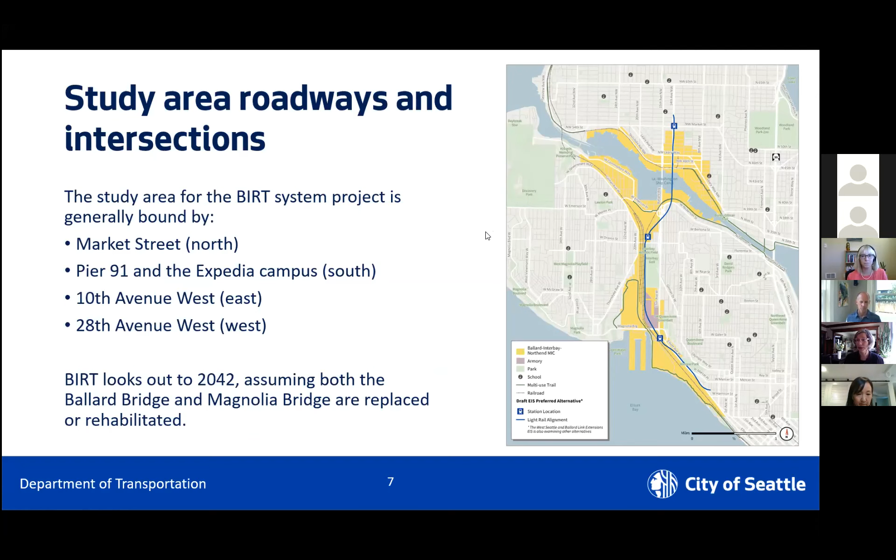We did a forecast and assessment of multimodal integration with our Fehr and Peers consultant team and Concord. We are here in July and August, and we are involved in a cost benefits analysis of both the social and economic impacts of both the Ballard and Magnolia bridges.

We're going to be moving into September before we know it, where we'll have developed the bridge replacement timeline and a funding strategy. And I need to say at this point that the bridge replacement timeline and funding strategy is basically saying, if we started today to replace the bridges, what would it take to get there?

So how much design time does it take? How much public outreach time does it take? How much environmental time does it take? Where do you find funding, both federal, state, and local, perhaps in terms of a Move Seattle levy or other funding opportunities? So this is just conceptual.

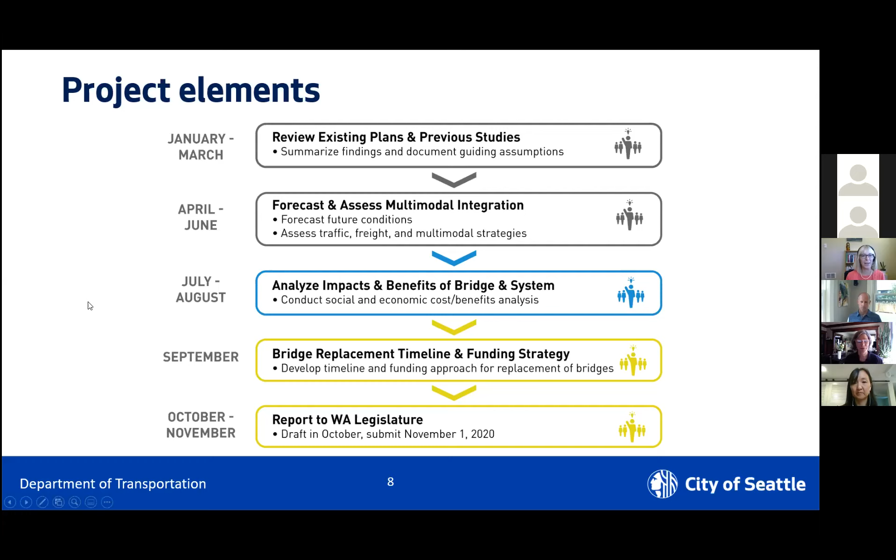Great, thanks, Diane. So in terms of the products that have been created and the deliverables that are complete, you can go to our website, which you see in the bottom middle of this slide, and you can review the document and plan review. I think it's around 70 pages: the methods and assumptions memorandum, the multimodal needs assessment, and coming soon to the website will be the social and economic baseline analysis.

These are all of the products that will be informing our report, and they're quite detailed. They will serve as appendices more than the report itself.

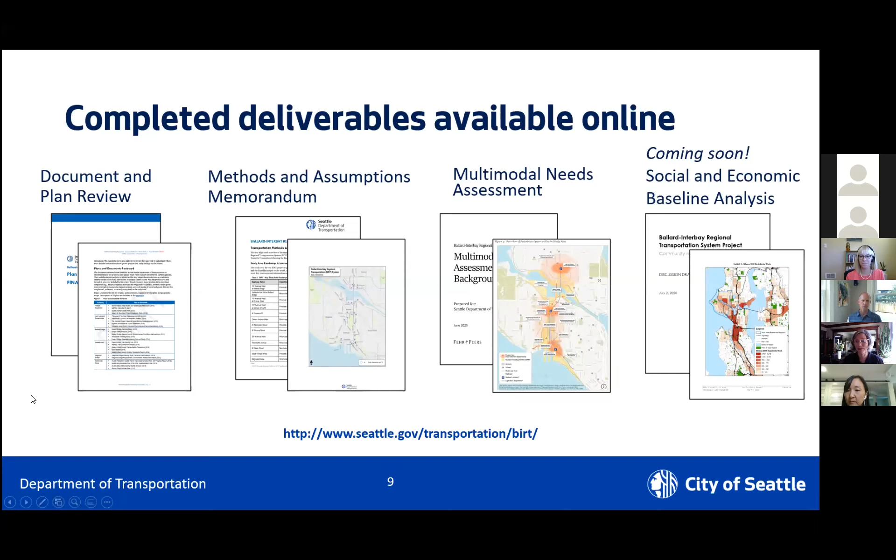Next, we've been doing some stakeholder outreach and engagement. This is largely a technical study, and yet we want to hear what people think about our recommendations and their concerns about their neighborhoods and how they travel and how they get around and how they want to get around in the future. We have met with several of our elected officials and community organizations. The City of Seattle has modal advisory boards; bike board and freight board are the ones we've spoken to.

Chisaki has helped create a worker survey down in BINMIC. We've had some business interviews and meetings. We are working with Sound Transit on the West Seattle Ballard Link Extension Project, and I have been involved in those surveys. We've talked to the bicycling and walking community from the neighborhood greenways, and we have also been in coordination with the Mayor's Maritime and Industrial Strategy Project.

So we are very grateful that you are all here participating. We strongly encourage you all to go online, take the survey if you haven't, and make comments on our recommended projects. But we have this meeting, and we have a meeting next week on Thursday at 6:30.

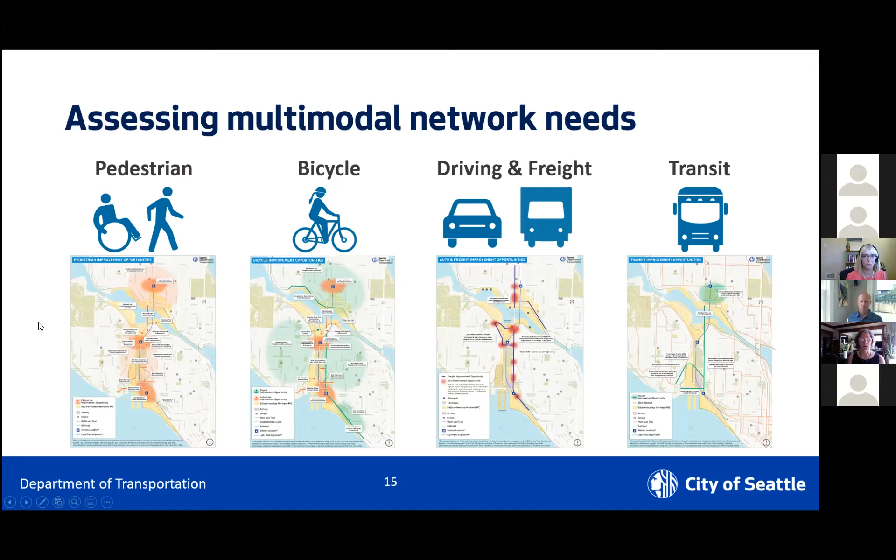As we head into the next piece, I want to quickly touch on a question that was asked, related to needs around the Ballard locks and coordination with the Army Corps' Ship Canal Master Plan. That has definitely been part of the work, and you'll see that reflected as Tom moves into talking about some of the specific projects. In addition to the Ballard Bridge being a core bike connection, the locks was another one that came up, so we'll wrap that in as we start talking about the projects moving forward.

Thanks, Jennifer. So again, BIRT is really focused on improving movement for goods and freight using a multimodal system of improvements. While replacement of the Magnolia and Ballard Bridge is a core topic of this study, we are really looking at producing a coordinated set of phased improvements that address multimodal needs for all users throughout the district. The project looks at bicycle and pedestrian needs and where there are gaps and opportunities to fill those, safety for all modes, and transit from the standpoint of maintaining reliability, improving passenger amenities, and providing connections to core services, including future light rail.

We're looking not only at spot improvements but corridor level improvements as well. We know that as trucks move through the district, they're more concerned with how long it takes them to get from point to point versus performance at a specific intersection, and what that means for roadway design and safe movement of freight. We know our industrial and freight haulers want to move safely and protect pedestrians and bicycles as well. And then, of course, the bridge projects that really ground our work here.

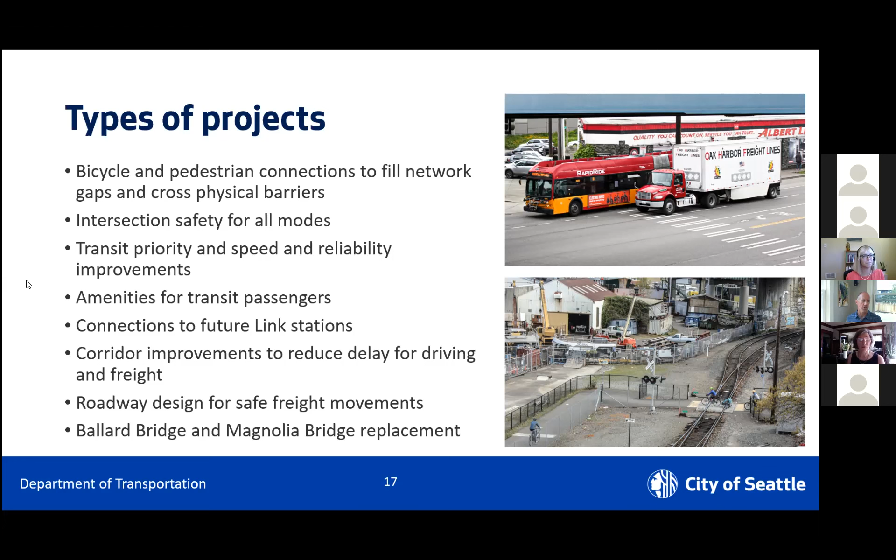We want to be clear at this point that no decisions have been made about bridge alternatives. There have been very complete planning studies prepared for both the Ballard and Magnolia Bridge that we're using as core inputs for developing that timeline that Diane talked about. We have taken the two highest prioritized alternatives from each of those studies as inputs to the scenarios we're looking at within the course of this study.

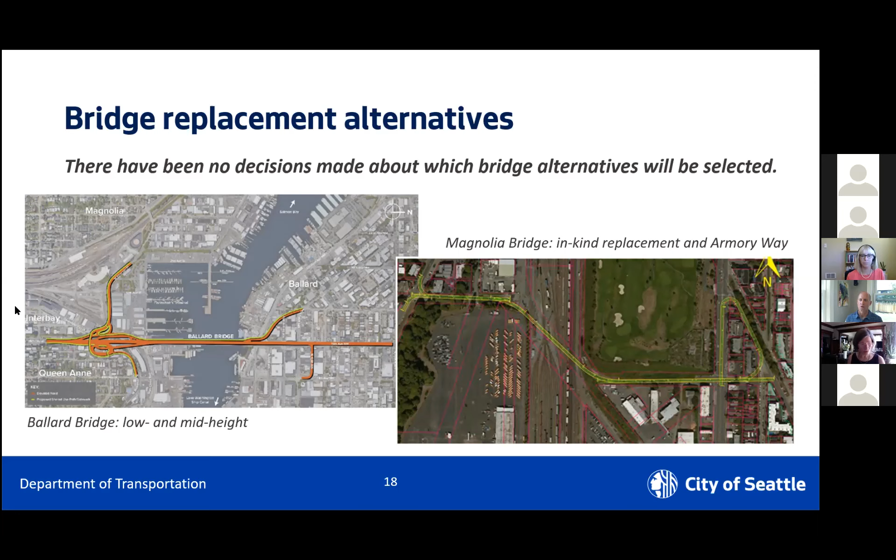For the Ballard Bridge, that includes both the low and mid-height alternatives, for those of you familiar with that work. And for the Magnolia Bridge, that includes both the in-kind or one-for-one replacement and the alternative, which is the Armory Way alternative. For those familiar with that, it has several elements. A core element is a new Armory Way connection between 15th and Thorndyke, and a new West Uplands perimeter roadway.

As we move into the potential projects, we're going to be talking about a wide range of multimodal projects here today. The team has evaluated over 80 projects, looking at their ability to meet those core project goals and criteria that we talked about. After that first round of analysis, we're moving forward more than 40 projects.

There's a lot for us to talk about. We won't be able to get into all projects in detail, but we want to hit some highlights and encourage everybody to go to the website. We've got an interactive project map that shows each individual project. You can comment on it there. I know many of you have done that already. I believe Jerry is going to post the web link to the chat in case people want to bring that up during the meeting.

I would stress that we have a range of small to quite large and substantial projects included. Some of our projects are dependent on one of the specific bridge alternatives. For example, we have a concept that includes freight and transit lanes on the Armory Way Bridge, which is obviously associated with the Armory Way Bridge alternative and not the in-kind Magnolia Bridge replacement alternative. Again, the website makes that clear.

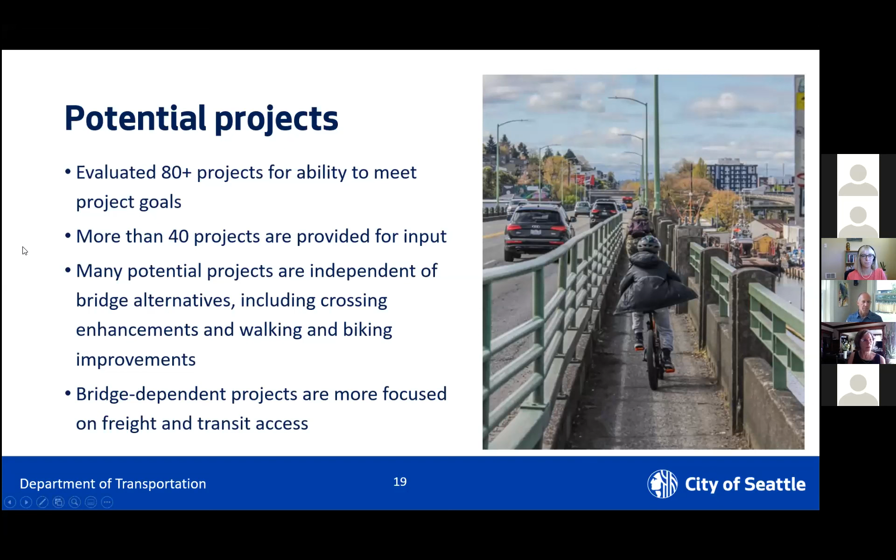We also want to note that some projects are in tension. We have concepts for different portions of roadway that probably couldn't both be implemented, but all have strong value. So one of the things we're really hoping for from this round of input is to get the community's perspective

on some of those projects that may be in tension in terms of their implementation. So with that, why don't we move into our description of projects by mode, and we'll start with our pedestrian projects. Historically industrial areas were really not developed often with pedestrians in mind, but with light rail coming and more diverse land use activity in these Ballard and Interbay neighborhoods, we know that there's a strong need today and in the future for safer pedestrian movement and a higher quality pedestrian experience.

Our project list includes a number of corridor-long and site specific projects that improve sidewalks, that address lighting, ADA curb ramp needs, as well as bridge crossing improvements for major impediments such as arterials or the rail tracks.

A couple of the core corridors where we propose continuous improvements include 14th Ave Northwest in Ballard. That's a project we've seen a lot of support so far on the website for. Northwest Market Street, as well as the Elliott and 15th Ave West corridor. Those are all corridors where there's significant opportunities for sidewalk widening, pedestrian enhancements, better landscape buffer to protect people from moving traffic along the roadway, lighting, and curb ramps.

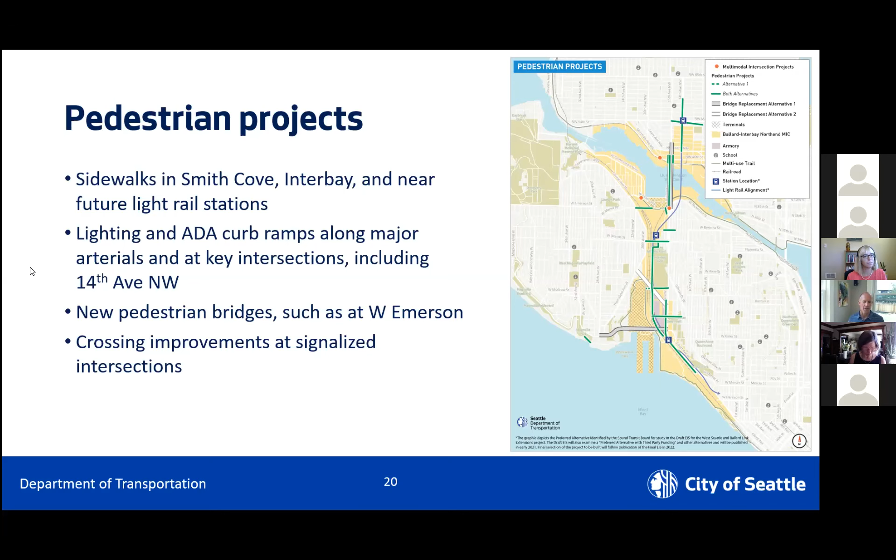One example of a pedestrian improvement is the West Emerson Street overpass concept. This is a location where we've heard a lot of comment, including from the Magnolia Community Council, about the danger of school students and high school students crossing 15th Ave West here at an unmarked and rather dangerous location to move between bus routes as they're making trips.

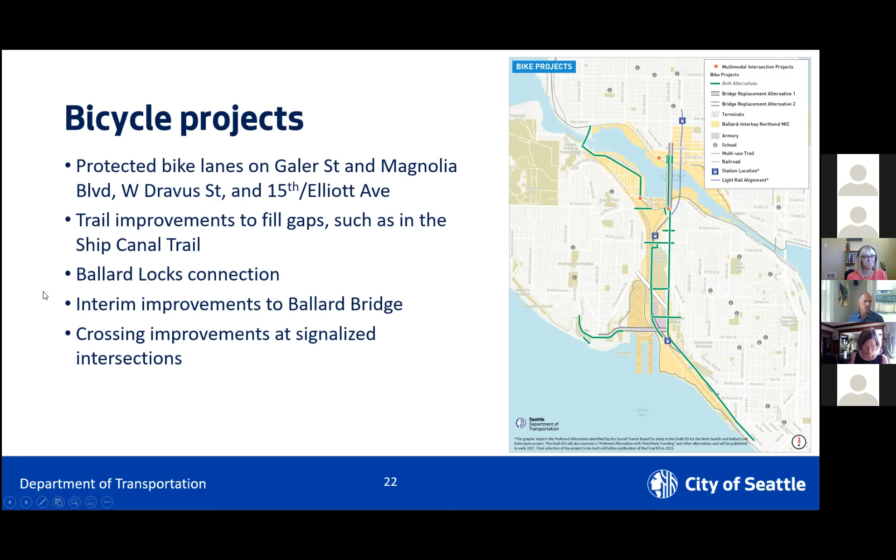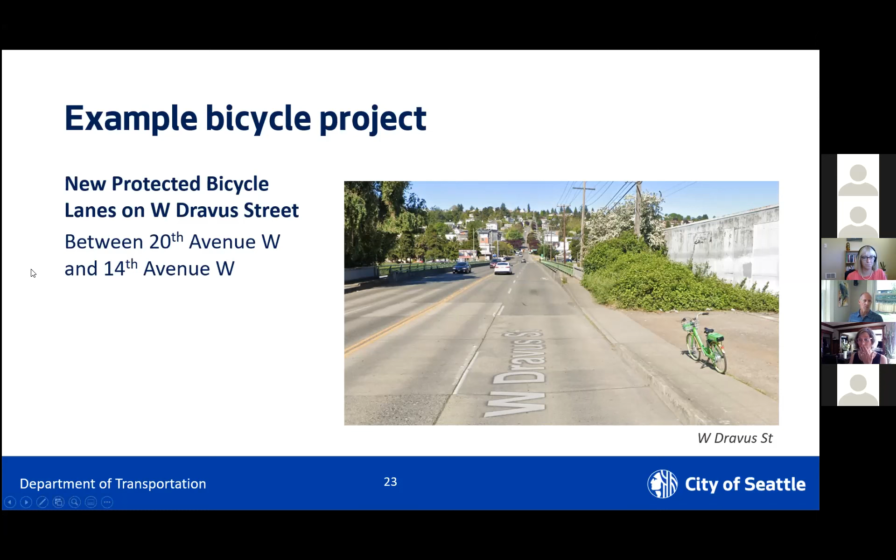As I mentioned earlier, this is one of those places where there are a number of multimodal needs, so this project may be in some tension or have other ways to be considered as we look at other needs in this portion of the corridor, including for transit.

I also want to mention that while we're walking through these projects, a number of them are truly integrated and multimodal. A good example is where we're looking at an opportunity to improve safety for bicycles and pedestrians, but also doing so with the importance of freight and truck movements in mind. 21st Avenue and Emerson Place is a project that comes up as one we've heard a lot about - close calls with trucks, peds, and bikes - from the freight community, who want to be able to move through that more safely. So this is a project where we really have the opportunity to address safety and reliability needs simultaneously.

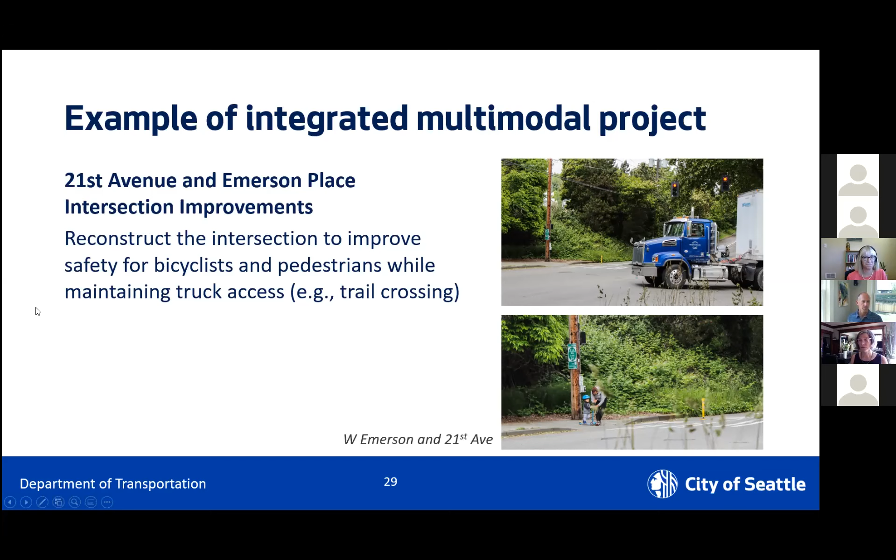So moving on to transit and freight. We certainly know and recognize that transit and freight do not have all the same needs. But within the context of the BIRT study area, where there are fairly limited numbers of arterial streets, bus transit and freight and goods movement tend to need to operate in the same corridors and on the same facilities.

We also know that with future development of the light rail system, there will be quite a bit of change to the bus transit system in this area - some streets will have lowered bus volumes due to the new grade separated light rail line, but there are also potential plans to restructure new service to terminate at or near light rail stations. So while we don't talk a lot about those station-specific needs relative to intermodal bus movements, those are being planned as part of the Sound Transit project, and we're in close coordination with those teams to recognize those needs.

So as we look at some of the core opportunities for transit and freight, one of the things we're looking at is the opportunity for transit and bicycle integration on that West Dravus Street section we talked about previously. This would be a little bit different look at how we use that cross section, potentially allowing transit and bicycles to operate in some of the same right-of-way, given the physical constraints in that area.

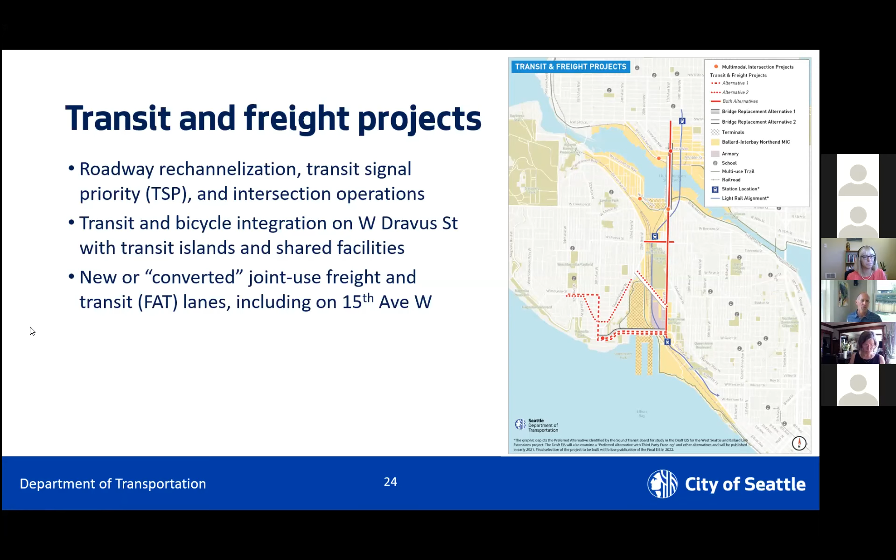Another concept that comes up a couple times in the project list is the idea of using new or existing transit lanes as joint use freight facilities. And how would this work? We've got an example on the next slide of one of the projects, which is the 15th Ave freight and transit lanes between Denny and Market Street.

Essentially, this would allow both transit buses and freight and delivery vehicles to use the bus-only lanes on 15th Ave during off-peak times. It wouldn't allow trucks in those lanes at peak transit times where we have high bus volumes, but while there is more capacity, it would provide an opportunity for trucks to bypass some of the congestion in that corridor.

Tom, as we're moving on to talk about corridors, one question that has come up, which gets to something you were talking about before in terms of some projects potentially being not necessarily in tension with one another but maybe not able to do everything - is the bike project and the transit project mentioned for Dravus about reconfiguring the roadway space that's there versus widening, recognizing, as some folks are pointing out, that Dravus is an important connection, but it's trying to do a lot as well?

That's a good question, and at this point, we're open to both alternatives, but again, we recognize the very, very high cost of replacing that bridge facility to add more right-of-way.

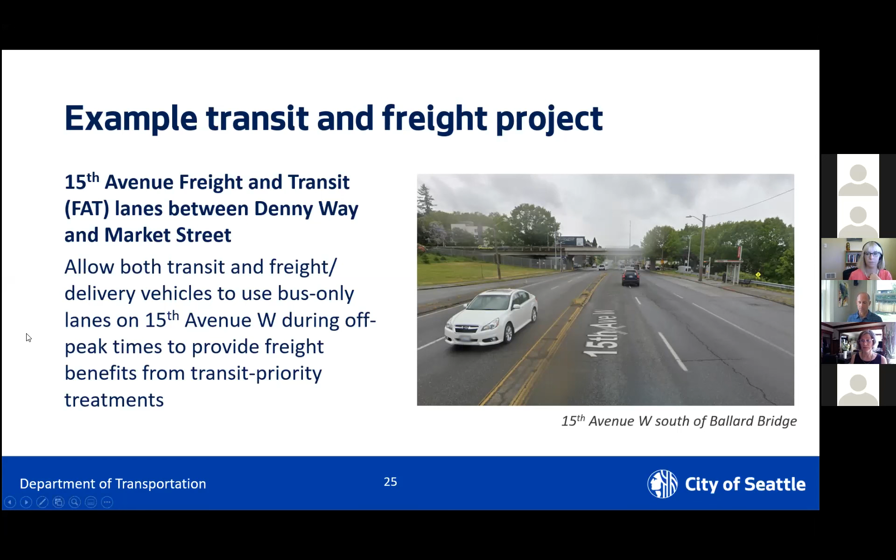Okay, great, thank you. So I'll move you on to corridors, and then we can come back to that as we head into Q&A.

In the transportation business, when we have very constrained corridors serving many needs, as we've shown to be the case here in BIRT, given the relatively limited road network and the pressures on that, one of the things we look at is how we can improve operations, which for the user means more reliable movement through those corridors, more reliable travel times for people in vehicles, for transit, for freight.

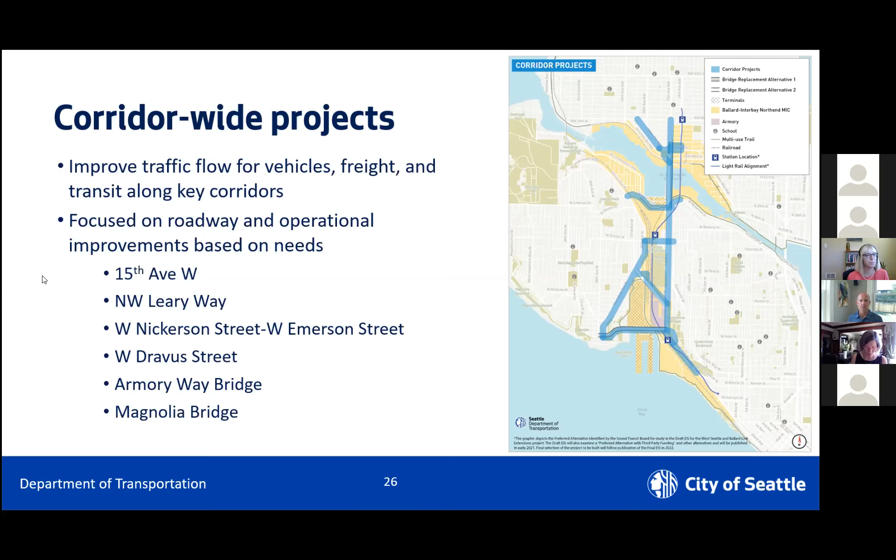I'll talk about what some of those strategies look like, but the key corridors that we've applied this end-to-end lens for within the study area include 15th Ave West in the north-south direction, Northwest Leary, the Nickerson and Emerson corridor, West Dravus, the Armory Way Bridge, and the Magnolia Bridge connection.

Some of the types of strategies we're looking at within each of those corridors include signal operations - is there anything we can do with signal timing to improve reliability through those corridors? Use of intelligent transportation systems, be that for general purpose traffic and or for transit. Traffic control, channelization or striping, which in layman's terms essentially means reallocating the right-of-way differently, changing the configuration of lanes.

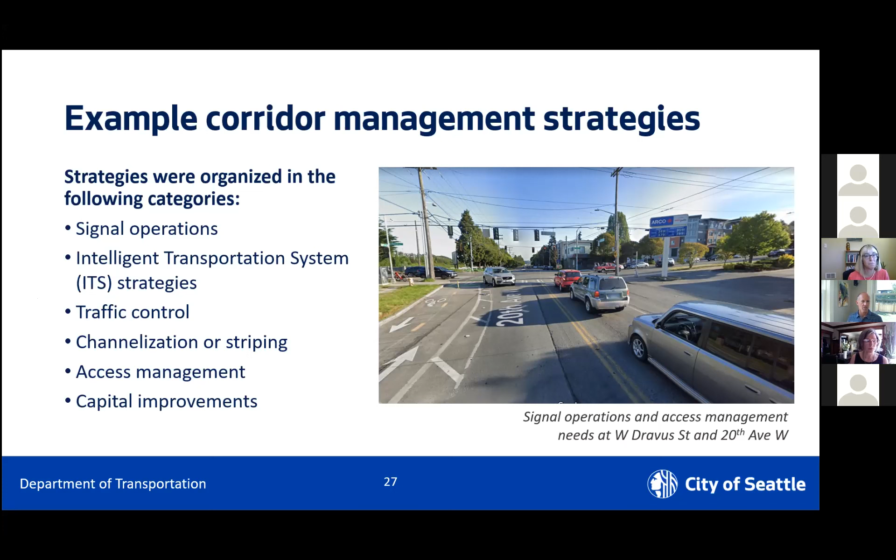And how those are allocated to different vehicles. Access management, which refers to the number of entry points into a facility - is there an opportunity to consolidate some of those so we have less interference with roadway operations - and other types of capital improvements. So those are some additional corridors being looked at with an additional lens as we move through this process.

Again, we want to stress that what we're really striving for in this plan is a set of phased multimodal projects that develop an integrated system that best serves the Ballard and Interbay area over the next 20 plus years. That will include projects from all the modal elements, and we'll consider those in a phased manner. As I mentioned, many of these projects have clear relationships to the bridge alternatives, but some don't and may be able to be implemented earlier, irrespective of that timeline required to plan, design, and fund the bridge projects.

That is a quick summary here, and I'll turn it back to Jennifer. Thank you, Tom, thanks for running through all of that so quickly.

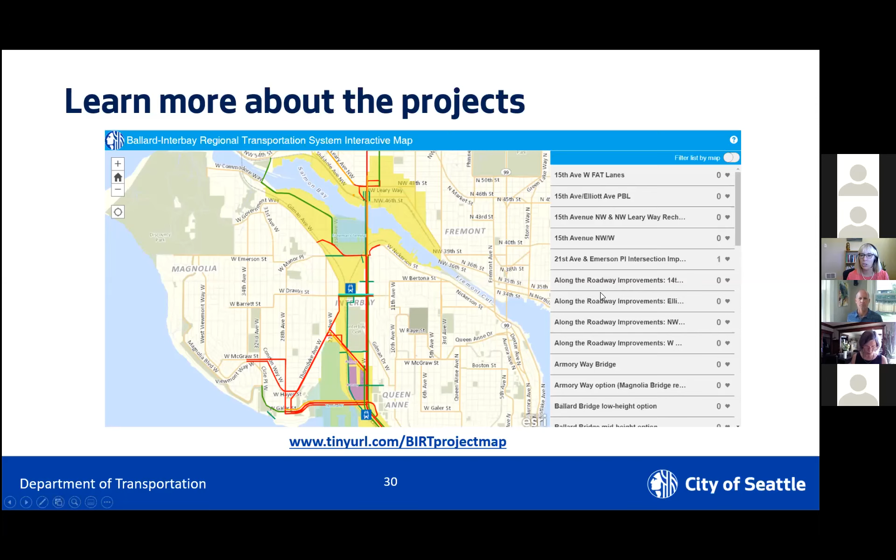A few things you might think about as you're formulating questions: which of these projects or types of projects that Tom talked about do you feel best support your travel needs, whether that's to or through the Ballard, Magnolia, and Interbay neighborhoods. We're curious, some folks in the chat mentioned they like the way some projects are paired. If other projects jump out as feeling very connected, we'd love that feedback. And if there's anything in this quick review that we missed, or that you're not seeing in the online map, we'd welcome that input too.